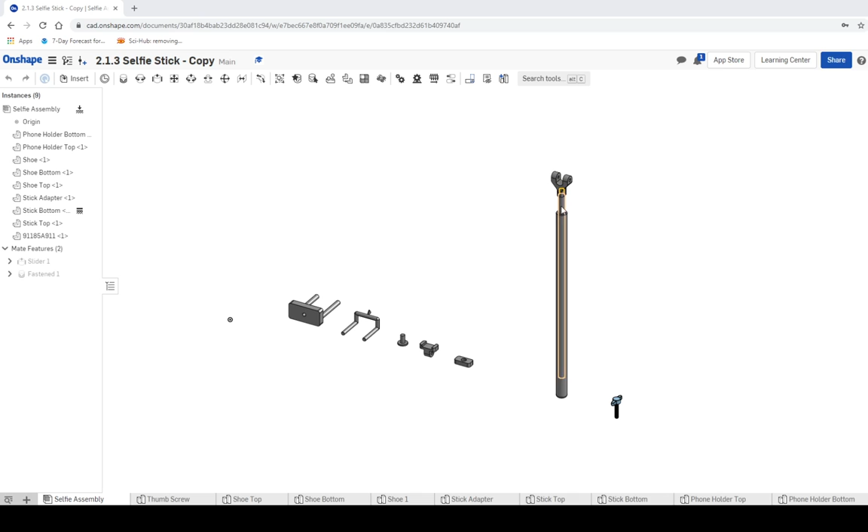Okay, this is the next part of 2.1.3, making the selfie stick. Last time we created the base and the slider, and attached this top device up into the stick. We're going to keep going, and the next logical step is to take this shoe and move it up into the selfie stick assembly.

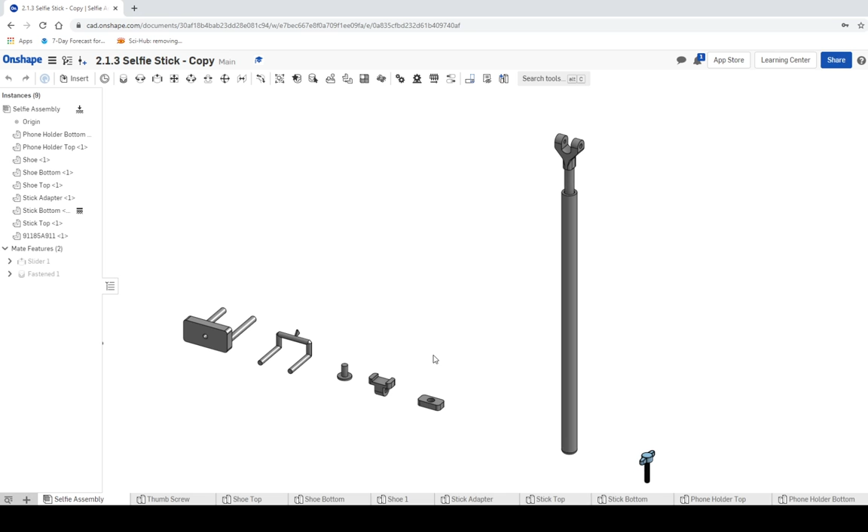Remember, you've got to be careful about what you click on. This is the most important part in this setup, so we're going to exercise caution whenever we use our mates. I want this thing to move around and rotate around the pivot point here, so we're going to have to use the Revolute mate. The Revolute mate allows you to go in a circle around something while keeping the degrees of freedom locked.

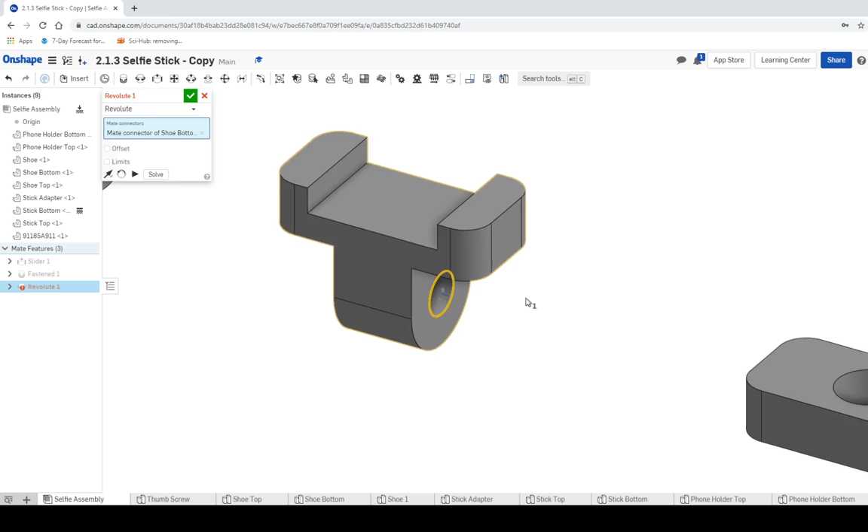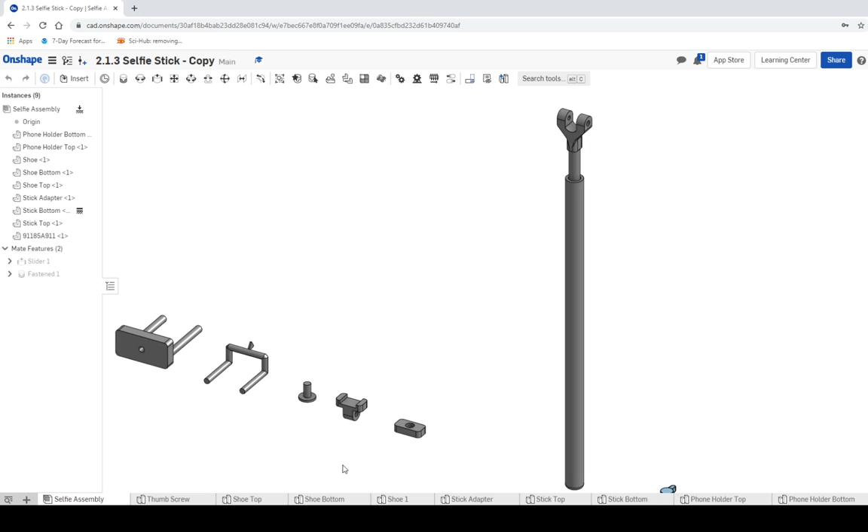Don't forget, whenever we set up the mate, there's push out and push in. I'm always going to try to keep it on the push out like this, and if it ends up reversed, I can flip it over later. I'm going to move myself back into this spot and see if I can get this to push out as well. Okay, there it is, and that was probably not the best idea, because I probably wanted this on the inside. Maybe I can fix it real quick. Nope, just kidding, let me try again. I'm going to try to put it on the inside. That's a good example of what not to do, though.

We're going to do Revolute Mate, click on this, and that makes sense whenever you see it. This outside needs to be attached to this inside here. That part was just kind of dumb of me. There we go, now we can flip this over like this and have it set up.

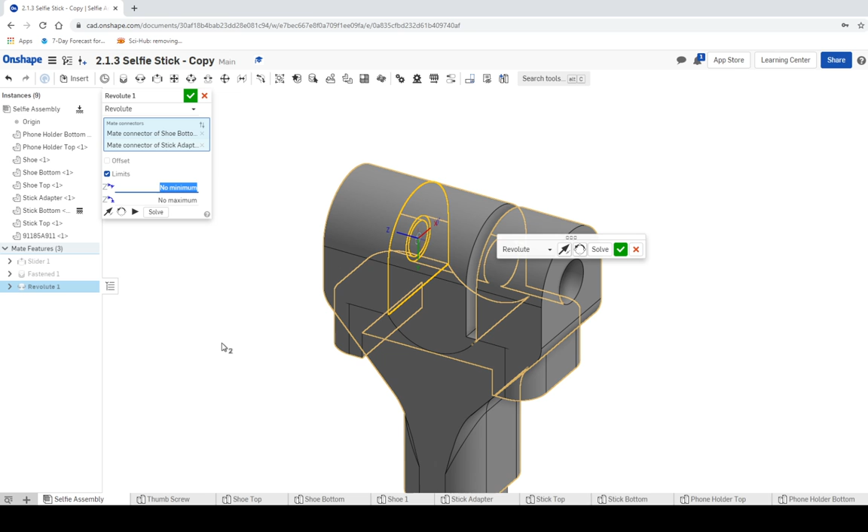Now it's down there on the bottom, and we want it to kind of rotate around, so we're going to need to add some limits to this. Let's play around with some degrees and come up with a positive limit and a negative limit. Let's try 120 degrees-ish going to the right, and 120 degrees for that one too. Let's see if that actually locks it in place on just one spot.

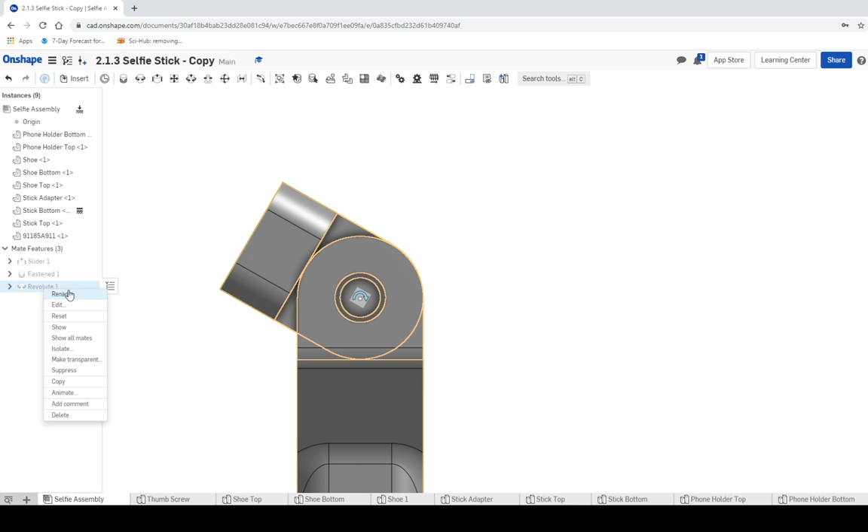Looks like we might need to do negative 120. Let's try negative on one spot. Negative 120, nope, it doesn't like negatives, just kidding. All right, we'll try 120 and 120 and see what happens, and I'll click the check mark. We should be able to rotate this around now, and it looks like I've got it set up to not move at all. So let's go back in, right click on the Revolute, hit edit, and we're going to change this. Let's see if we can change this to 0.

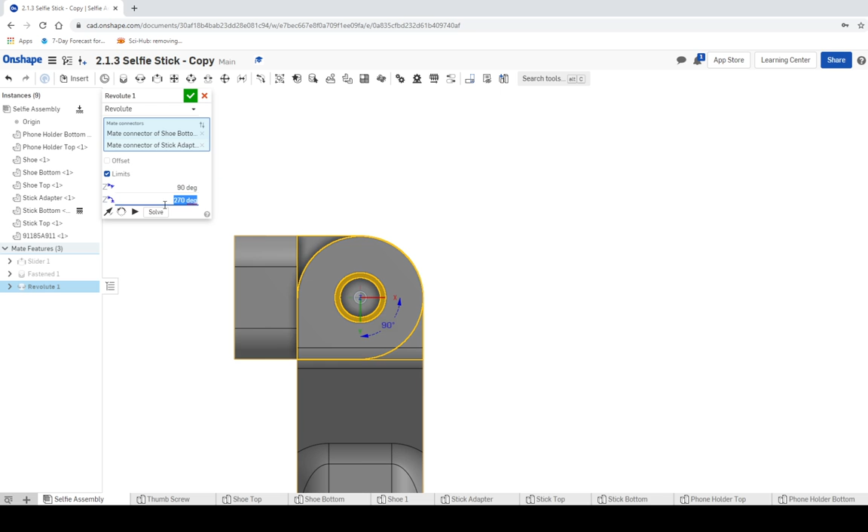Okay, it looks like we're starting down at the very bottom. So why don't we change this to 90 degrees, and change this one to 270 degrees? Let's see if we can do that. Green check mark. So it starts off with 90 and then moves over to about right there. That would be like the maximum limits you could put on this thing. You probably want to be a little bit safer and move towards a little past 90, but I think this will work out just fine. This is as far as you can actually get it to go.

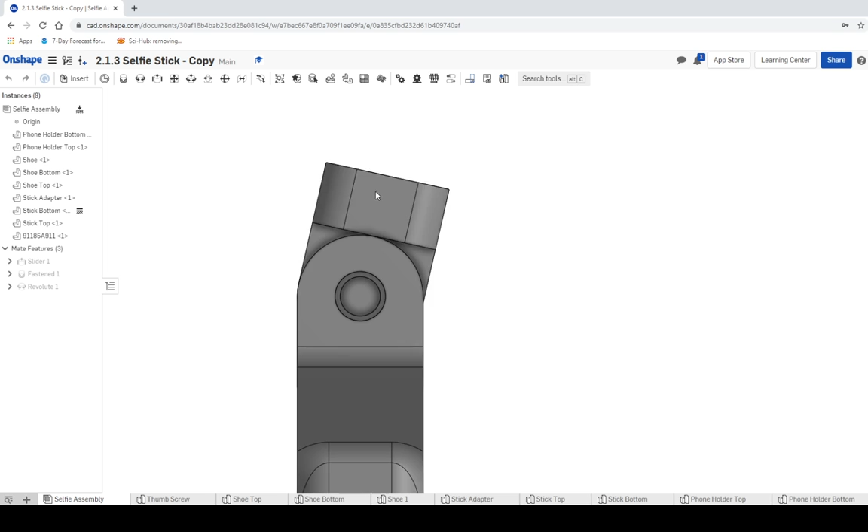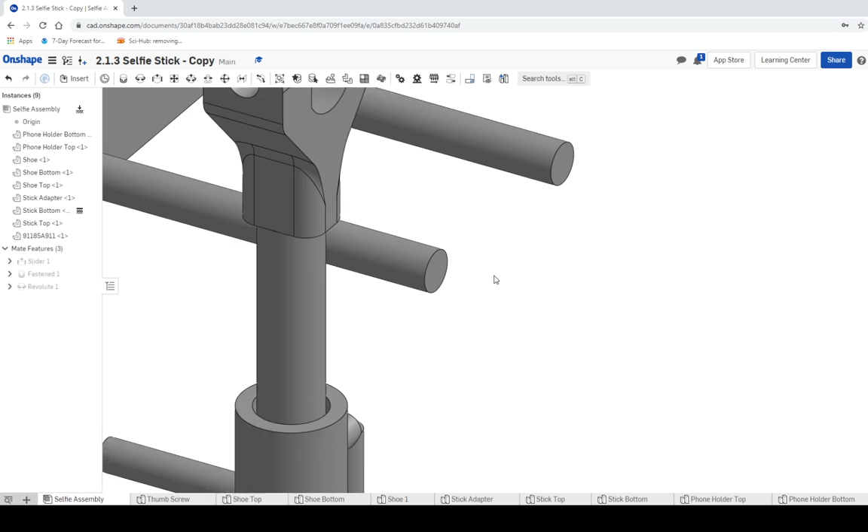All right, so we've got our assembly put on. Now it's time to start assembling the part that actually holds the phone. This assembly part has a rod, and if I remember correctly, that rod has a hole in it. Oh, actually, it looks like it's just a stick. Oh, let's see, okay, well, that's fine, we can deal with that.

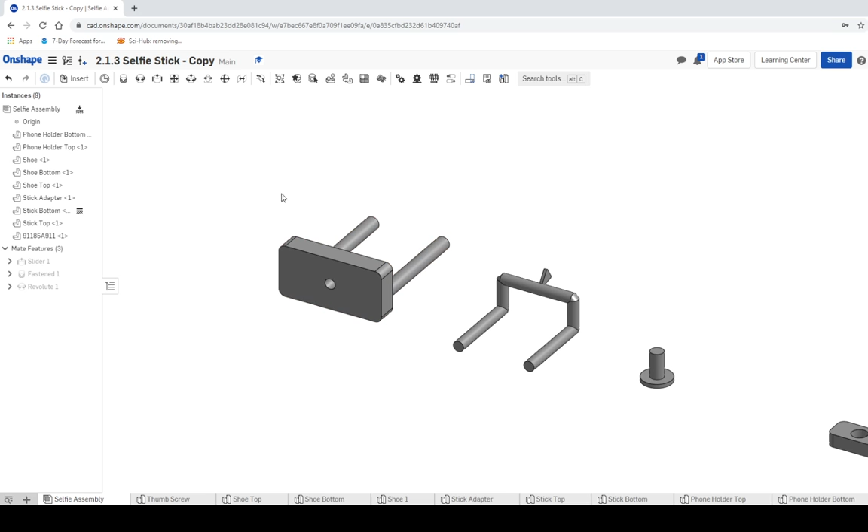What we're going to do is make it so this thing slides in. Pretend that this thing is hollow on the inside—whenever they designed it, they did not make it hollow, but we're going to pretend. So we're going to use the slider mate, and make this end. Make sure we zoom in so we can actually see that we're in the center of the circle, and make sure that slider is on this side, and that should put it in place.

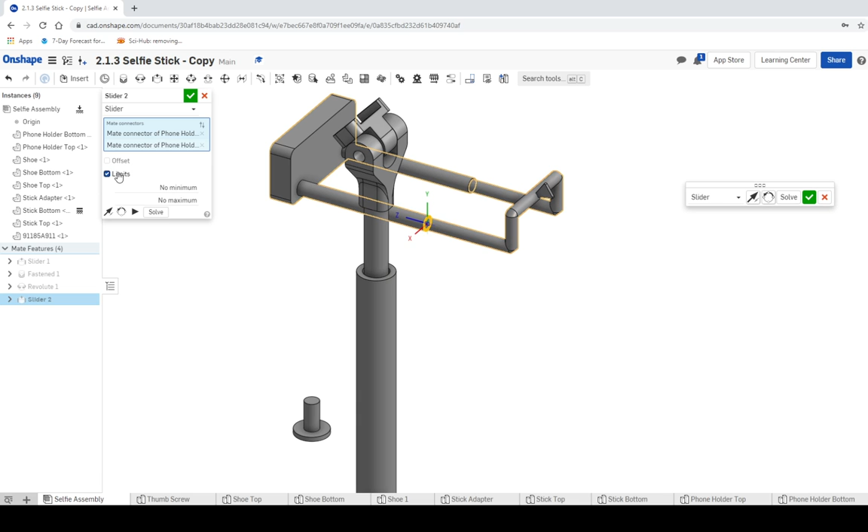Now I think we're going to have to put some limits on this as well. Whenever you look at it, you should be able to push and slide it in, but you don't want to be able to slide it out, so we need to put some limits on this. The maximum distance we're going to need is right where we are, so let's call that 0. And the minimum distance we need to be able to put it in, let's try 1.5 inches, and we may have to go back in here and edit this to make it work. Maybe we should try it the other way.

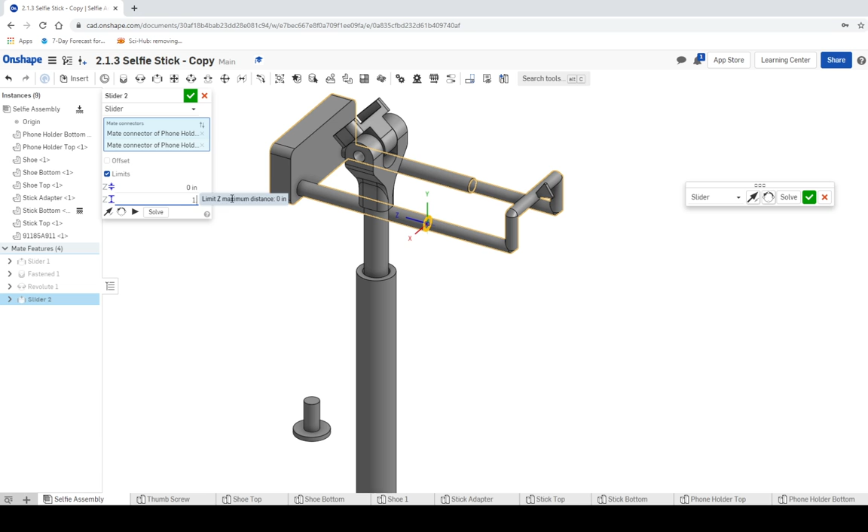Try 0 for the minimum and 1.5. All right, let's try that and see if our limits are actually put in the right direction. Oh, looks like it's working. And it actually looks like that was a reasonable distance to put in as well too. All right, at least that works, I'll take it.

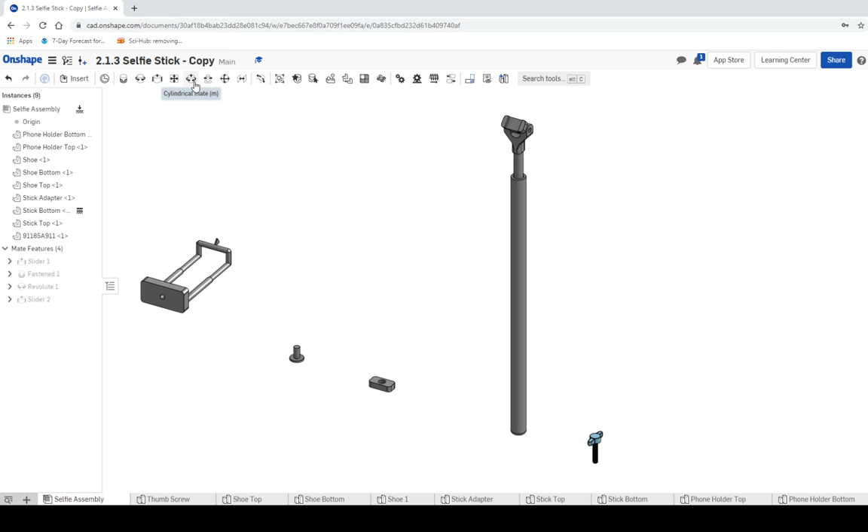Now the next thing, let's insert this screw inside. In order to do that, we're going to use the cylindrical mate. So instead of using the slider mate, I don't want this screw to slide in. I want this screw to also be able to rotate, to give it some semblance of realism. So we're going to use the cylindrical mate for this one.

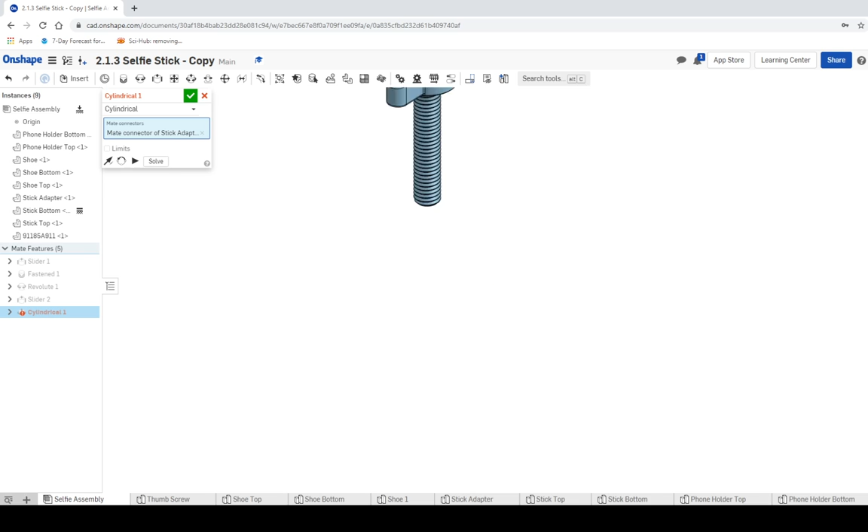So I'm going to click on the cylindrical mate, and I'm going to click on the center of this circle, and let's go ahead and push this one in since I know it's going to be going inside. Maybe that'll keep it from being flipped over naturally. Then I'm going to try to get the bottom of this screw. Oh, it looks like I got it. I'm going to put it there, so it should go into place. Let's see if it actually did. Look at that, that's so pretty.

It's almost an accident. So we're going to click our limits, and we don't really need a degree limit because this thing should be able to rotate around 360 degrees, but we are going to need to put in a minimum and a maximum limit. So let's say our minimum is 0, and our maximum, let's see, I don't remember how long this screw is. Why don't we just go for an inch and pray? I think that's probably the best.

And we're going to click the green check mark, and let's see what happens. I can click this and move it in. And it looks like, ooh, I went the wrong direction. My limits need to be reversed. See how this goes out instead of in? So my maximum limit needs to be 0 and my minimum limit needs to be an inch.

That's okay, easy fix. We'll go over here to cylindrical, right click, and then click on edit. We're going to change these limits. So say, okay, my maximum limit is 0 and my minimum limit is 1 inch. That should work.

Let's see, maybe if we do 0, -1. I don't think this thing likes negative numbers though. Yeah, it really doesn't like negative numbers. So let's see, 1, 0. Maximum mate limit shouldn't be...

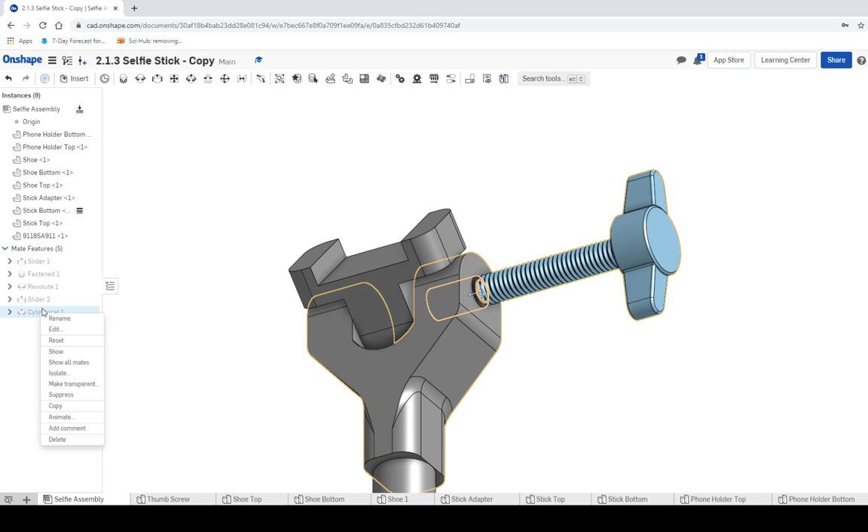So I'm going to go ahead and delete this constraint. I'm going to right click, delete this constraint, and maybe I should have taken my own advice from the very beginning. If I use the cylindrical mate right here, and I'm going to click on the outside, and then I'm going to make this one click on the outside as well too.

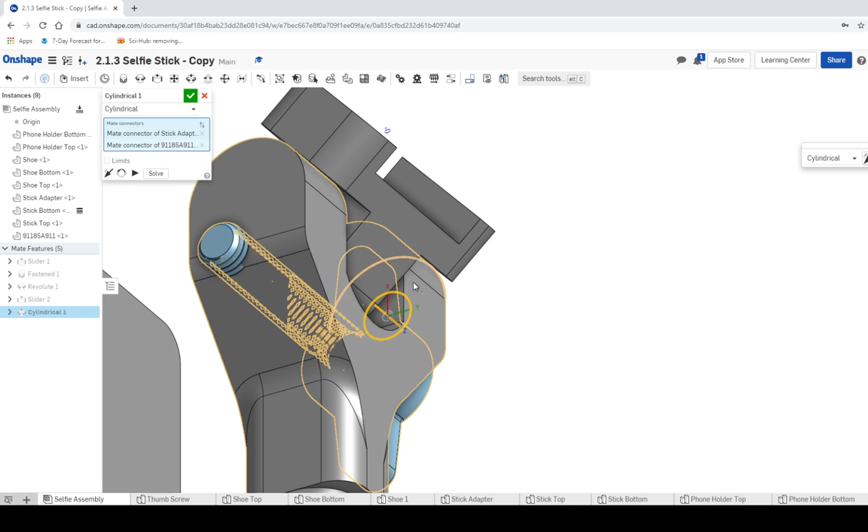I've got to zoom in and find it though. Where'd it go? There it is. All right, we're going to try that and see what happens. Let's get this to go back to the home view and see if I've actually got it set up right. I should have mated... must not have worked out the way I wanted it to.

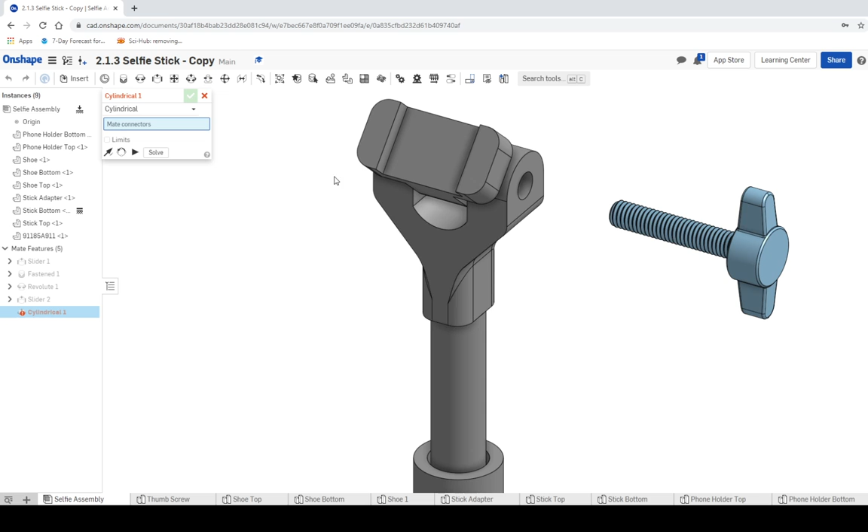I'm going to try again, one more time. Third time's a charm. So I'm going to go to cylindrical mate. I'm going to click on this hole, and then I'm going to click on this screw. I'm going to try my best to get over on this side and click on this. Yeah, there it goes. I'm not sure what happened last time.

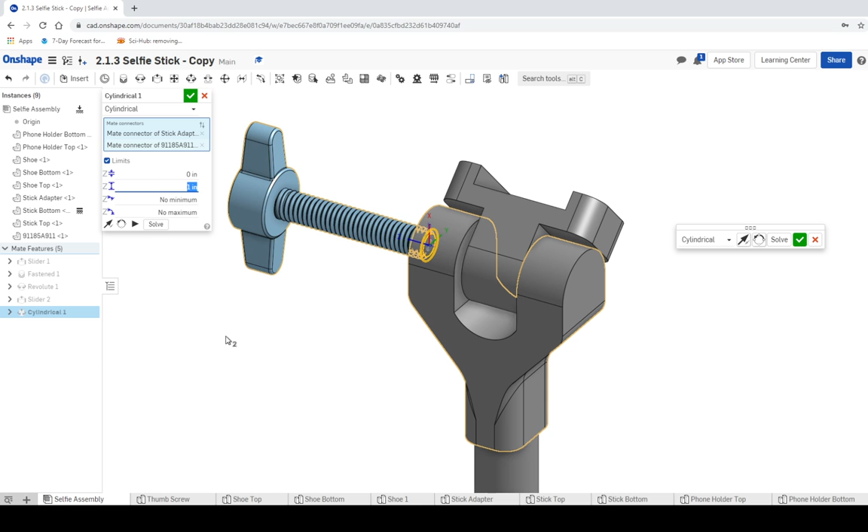And then we're going to try to put in our limits, and these limits should work out. So we're going to go 0 for the minimum and 1 for the maximum, and we're going to see what happens. Yep, and whenever I put it in the right way, whenever I take my own advice that I had at the beginning with making sure those mate orientations were set up in the right direction, I'm able to screw this in and it goes to about 1 inch and then it stops right there.